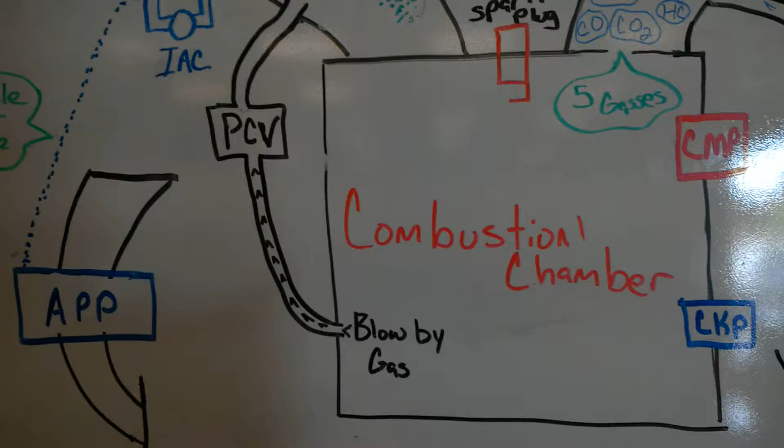When you start your car, air comes in through the air filter. When it comes in, it rolls past the mass airflow sensor, or MAF, which reads how much air is coming in. Then it rolls past the throttle plate when it opens up, the TPS sensor that opens the throttle plate, and then the MAP sensor, the manifold absolute pressure sensor.

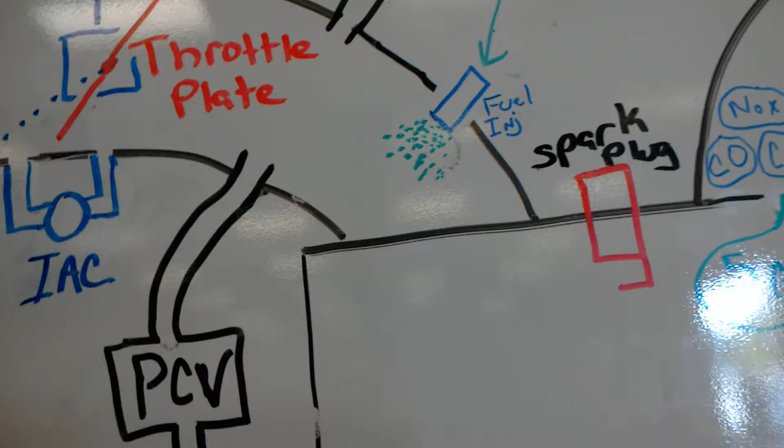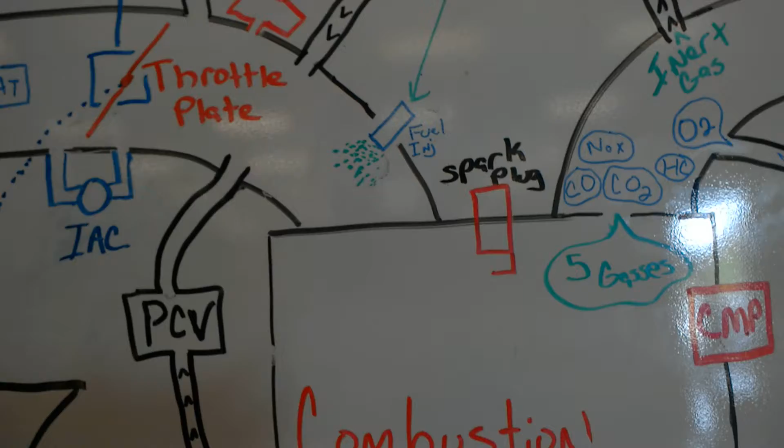Then it comes through and hits inside the combustion chamber, where your spark plugs and pistons are. The fuel injector shoots in there, the air-fuel ratio compresses, then spark, and it combusts.

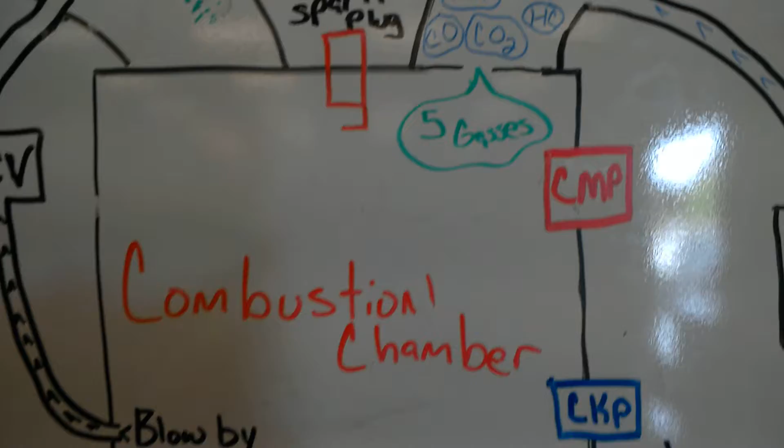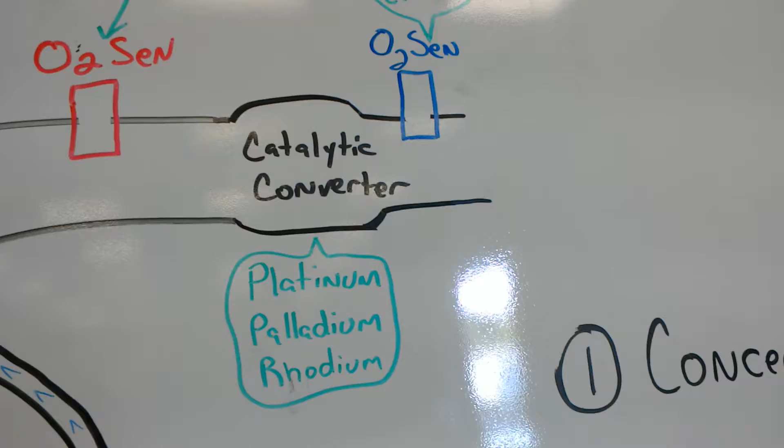Then it comes out the exhaust, past the O2 sensor, into the catalytic converter, and if it has another O2 sensor, it comes out the exhaust. And with all of that happening...

Exhaust gases come through the EGR valve, the exhaust gas recirculation, and it comes back through and shoots into the intake, back through the combustion chamber.

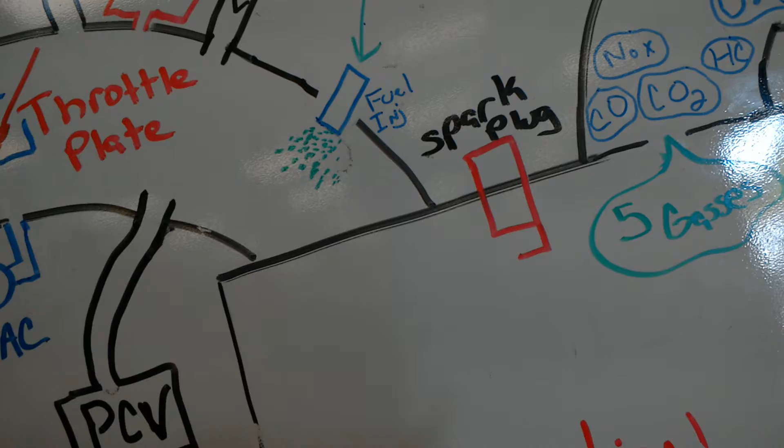Now, if you got blow-by gases, basically it comes through the PCV, back into the intake, right back into the combustion chamber.

The reason why it's doing all of that is because of emissions. With those emissions, it's trying to make the air more breathable and make it last longer for us, because you want a safer, better environment. You don't want to have the environment all messed up.

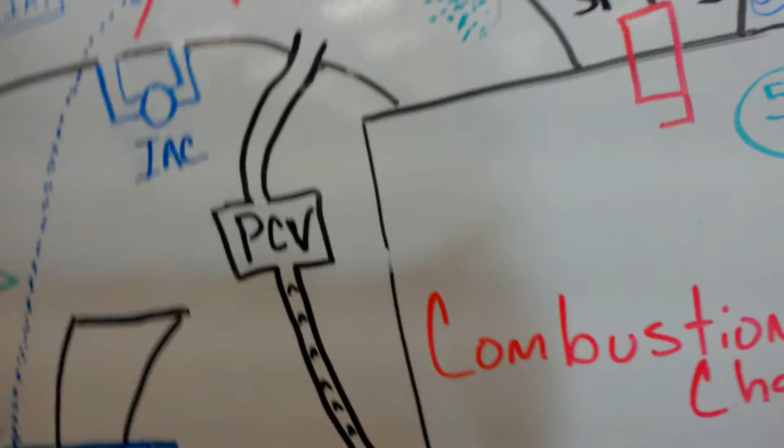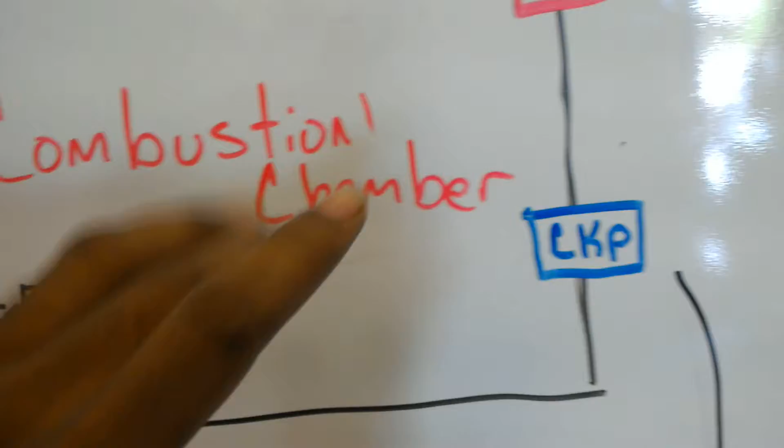And that PCV is the positive crankcase ventilation. You don't want to have too much pressure in the combustion chamber, so that's what happens. If you got blow-by gases getting past the piston rings, you create a lot of pressure inside the combustion chamber and inside the crankcase. You don't want that because it causes cracks and all that. So it goes back through and comes out.

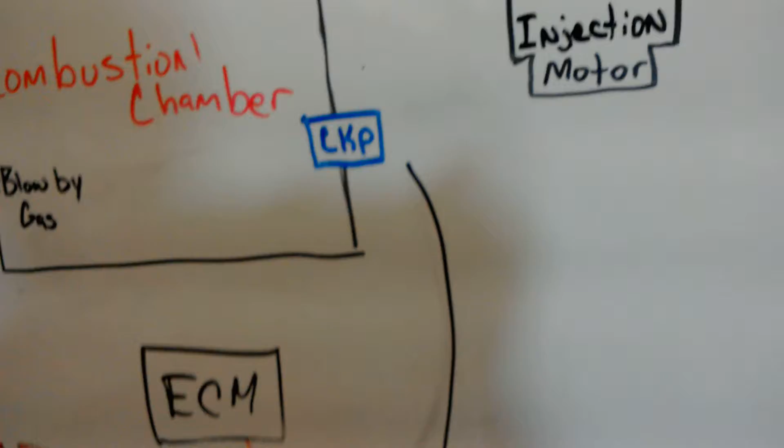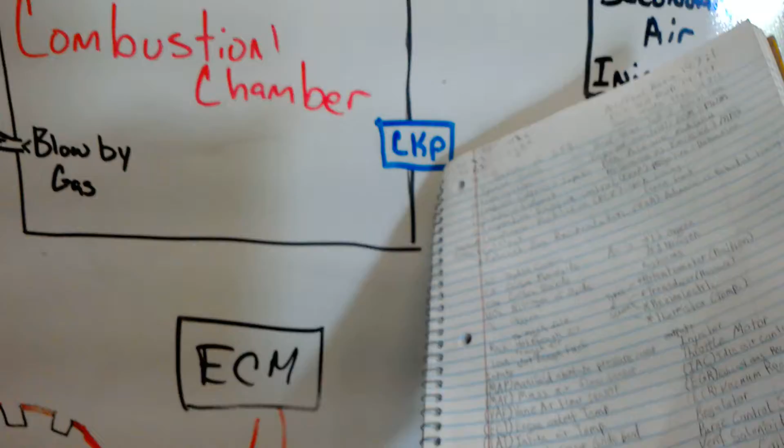And the crank position sensor, which is the CKP, and then the cam position sensor. The crank position sensor, it just helps you out.

And there's a lot of other systems involved with this, like the powertrain control module and the engine control module. All of these systems work together just so that your engine runs right.

And the reason why you want your engine to run right is so you can get from point A to point B with no problem.